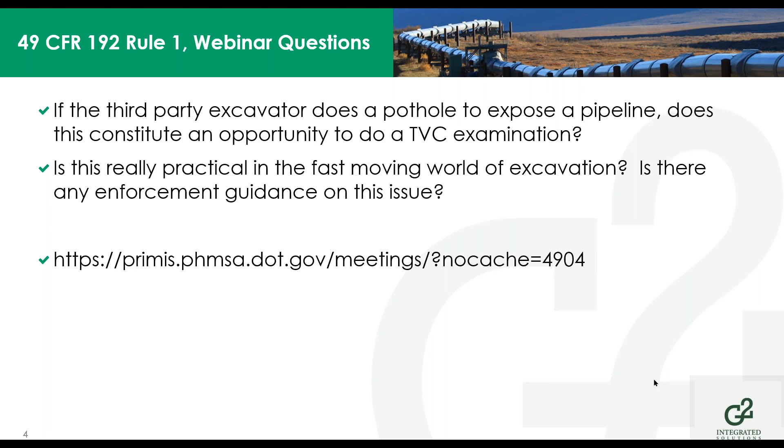We do agree that that can become a very difficult time. Someone's out just doing a pothole to identify where your pipeline is for some excavation or activity around your pipeline may not give you opportunity to do those examinations, but should those things move forward, and you have the opportunity to do so, PHMSA would expect you to do so.

Okay, and next, this questioner said, I missed the details regarding the process rule is not included in the 12/31 extension. It's talking about the stay of enforcement that PHMSA issued on April 22nd. The compliance date in that rule specifically identifies July 1st, 2020, of being a stay of enforcement surrounding that date. The compliance matters surrounding that date have been extended out effectively to 12/31/2020. So what was expected to be completed by July 1st, 2020 can now be completed by December 31st, 2020.

However, PHMSA does also state in that same document, they fully expect operators to maintain and continue their work towards compliance. So they would fully expect to see, even though we're involved in this pandemic and we've got isolation going on and staffing has been limited, that operators would have been moving towards compliance with that July 1st, 2020 rule.

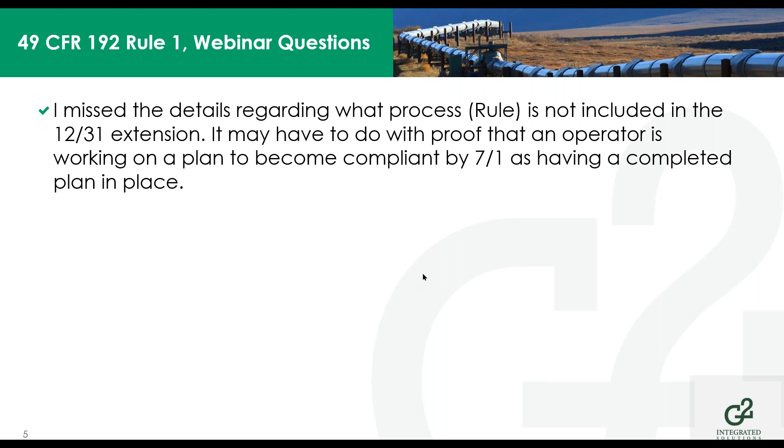Next question. Questioner asked, in a recent pipeline incident, a pig was stuck in the barrel. This would be between the isolation valve and that eccentric reducer that's typically in the barrel, from contaminants or possibly ice formation. The barrel was blown down, but the pipe between the isolation valve and the barrel was still pressurized. The barrel was opened, the pig became dislodged, exited the barrel through the open hatch, striking the employee. And the question is, is there any requirement to verify the entire assembly is depressurized or just the barrel?

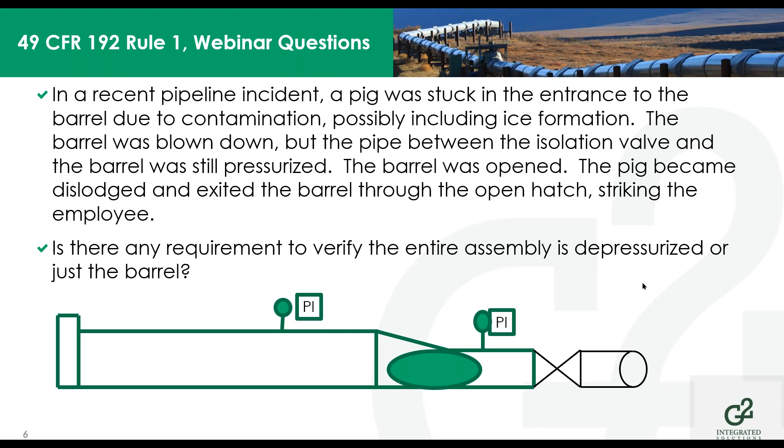Next one talks about, can a company use recent TVC studies to be compliant with the rule changes as long as the study was performed with the current requirements? And then they made a statement that says, I'm surprised how much of the mega rule seems to address things that companies currently do. And the rule does state that studies conducted before July 2020 can be used if they comply with the requirements of the regulation. Sufficient procedures and documentation of the study will be required to demonstrate compliance as always.

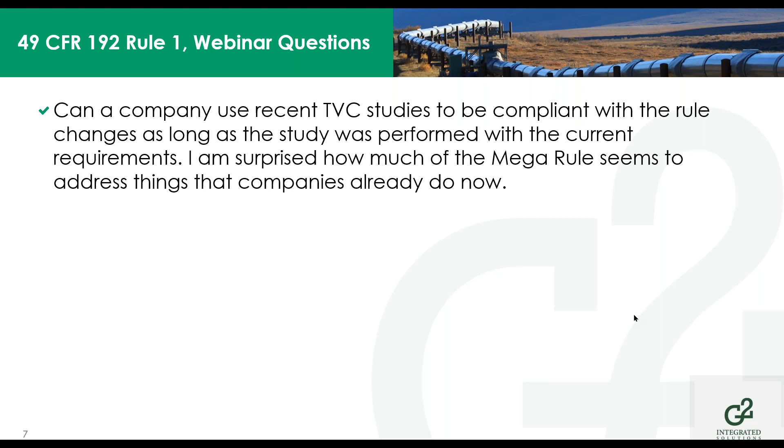And yes, it is true, and it is talked about in the preamble of the rule, that much of the language in the updated rule, Mega Rule 1, if you will, Section 1, addressed things that PHMSA had already addressed in the integrity management regulations. They just added clarification to those requirements.

Next question talks about, if the 15-minute hold for a spike test seems excessive, given research that has suggested a much shorter duration will accomplish the same result. And they want to know, how did PHMSA arrive at this required period? Well, first off, let's make it perfectly clear that we do not speak for PHMSA in any way, shape, or form. However, PHMSA did in the preamble address this very thing.

It talks about spike testing in the preamble, and it says using a short duration, very high spike pressure followed by a long duration integrity verification pressure provides greater assurance that the test is not growing cracks that could fail in service after the test is completed.

It states that PHMSA proposed standards for the spike hydrostatic test in 192.506, and PHMSA used several technical reports and studies, including PHMSA-sponsored research. One of those studies was the ASME Standards Technology Report, Integrity Management of Stress Corrosion Cracking in Gas Pipeline High Consequence Areas, and a final summary report, Recommendations for the Comprehensive Study to Understand Longitudinal ERW Seam Failures. In those studies, spike pressures ranged anywhere from 5 to 60 minutes in their application.

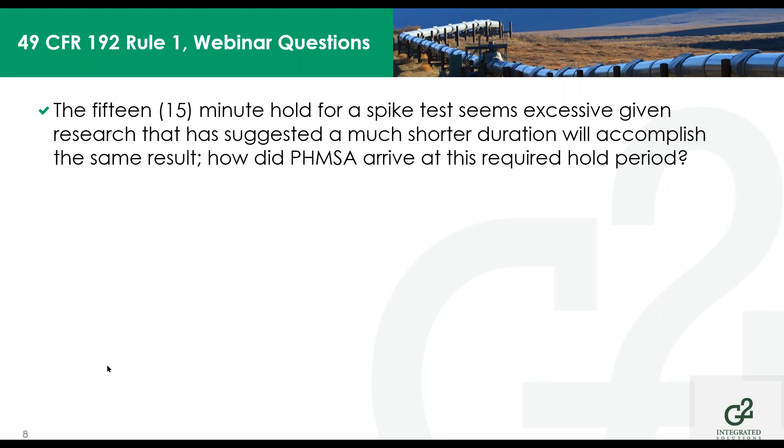The notice of proposed rulemaking recommended 30-minute spike duration, but in the end, the final rule issued changed that 30 minutes to 15 minutes. Now, I don't know if that answers the questioner's question, if that satisfies their desire, but my recommendation is that they would reach out to PHMSA for that and ask based on what criteria they settled on 15 minutes.

Next question says, what are the major downsides of any alternative technology over inline inspection for pipeline integrity assessments? 192.18 addresses notification to PHMSA for a variety of places inside the regulation. When the gas rule was published, alternative technology use is addressed. However, it requires that notification to PHMSA, and it requires specific information to be provided to them. And in some cases, it requires a 90-day waiting period.

So the alternative technology typically has to address the recommended practice, provide sufficient information to be comparable in a conservative measure to what the recommended processes would be. So in this particular case, alternative technology over inline inspection, the ILI, the alternative technology would have to provide as good information as the ILI would provide. Other technology that an operator demonstrates can provide equivalent understanding of the condition of the line pipe is what's necessary.

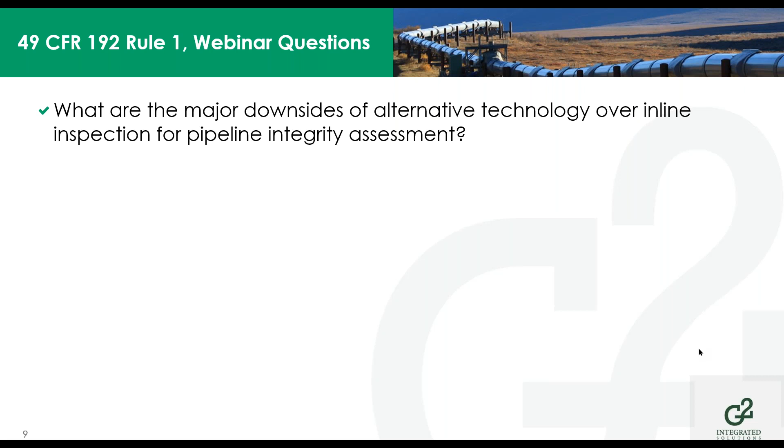So the difficulty with alternative technology is getting that information gathered that's going to give you comparable information to the provided technology, right? Number one. Number two is making certain that a subject matter expert is involved in that process, and statements to that effect are a part of that procedure and process as provided to them in accordance with 192.18. And then PHMSA can make a decision as to whether or not that alternative technology is acceptable.

Next question again talks about required spike testing. Will newer chart boxes be needed to clearly identify the 15-minute spike test, or will 15-minute interval reports be accepted? So in the spike test regulation in 192.517, it says there are specific pieces of information required in the report. Of course, the operator's name, the name of the operator employee responsible for the test, the name of any test company used, the test medium, the test pressure, the test duration. Then it talks about pressure recording charts or other record of pressure readings, elevation variations, so on and so forth.

But in the procedure itself, it says that 15-minute spike test has to be conducted once the test pressure has been achieved and stabilized. It is then raised to that higher pressure, and once that pressure has stabilized, held for 15 minutes. So I would suggest to you that a chart reading of that test would be necessary as a part of the record for performing the spike test.

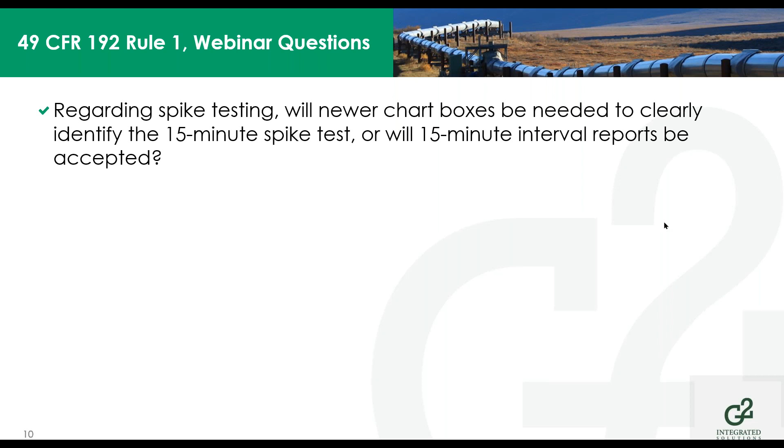Next question. If a previous assessment was completed, but not all of the 19 items were recorded or completed as the new rule determines, can they be duplicated, reassessed in order to meet the previous assessment requirement? So the 19 items identified in 192.712 is what we're talking about here. Indicates records you must document, justification, deviations, and determinations made for the following, and it says as applicable.

So the first thing you would have to do is determine what information you have of those 19 items. And as applicable, do you have all the necessary information that PHMSA requires to comply with 192.712? If not, then establishing those records, establishing that assessment would be necessary, and to fill in the gaps to be able to claim that previous assessment that was done.

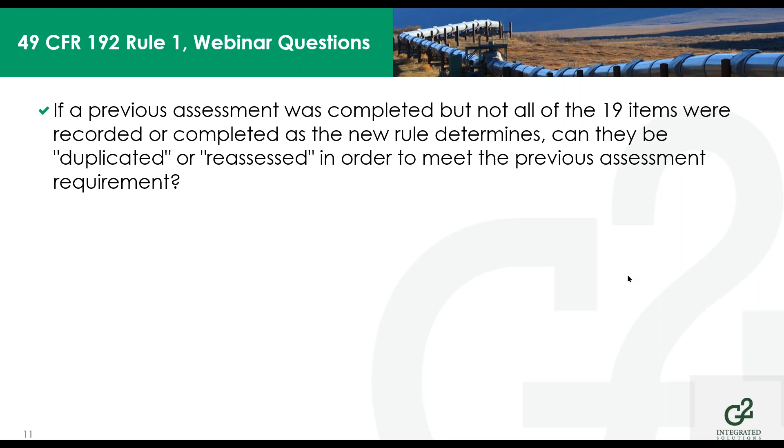Regarding the requirements for organizations to devise their own material testing plans, are there any accepted industry practices in place currently that strike a balance between confidence and cost? So in the preamble to the rule and in the documentation associated with it leading up to this rule, there was no specific circumstances of determining material testing procedures or plans to assess cost, specifically to this part of the rule.

No industry practices were identified in the regulations for material testing. The preamble does speak to material property records this way. It says PHMSA considers insufficient material property records to be those records where the pipeline's physical material properties and attributes are not documented in TVC records. So at this time, we're not aware of a study or analysis being done or presented for consideration on the confidence and cost factors for the material testing.

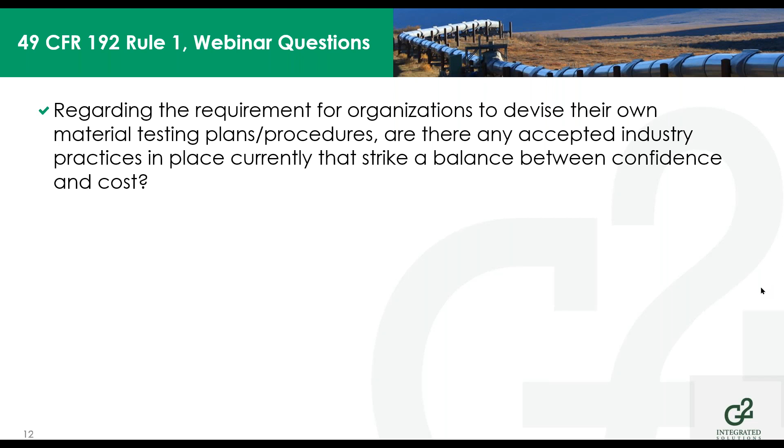That's something I believe that the specific circumstances of your pipeline segment in question would have to be considered. The environment, of course, that your pipeline is in, and the type of risk associated with your pipe and history of operation of your pipe would have to be taken into consideration as to what material testing practices you would follow and procedures you would use.

What is PHMSA's take in the situation where an operator just decides to class everything in the highest category of compliance when in actuality it's not in that category, such as if the pipeline's in class 1 and they decide to treat it as class 3 or 4, or if they have MCA locations but they claim they're HCAs? If they report in this way to the regulatory agency, and the regulatory agency then has to include them in the shuffle of actual higher risk pipelines, is that looked at as a problem by PHMSA?

Again, I have to say we don't speak for PHMSA, but we'll attempt to answer your question. As with any compliance matter, the regulations as stated on the cover page are the minimum safety requirements that an operator must achieve in order to operate their pipeline. If an operator chooses an alternative compliance approach other than what is prescriptive in the rule, they have to follow a more conservative compliance practice. And the only concern would be that they make certain they do a gap analysis between the two levels of regulatory compliance that they're trying to accomplish, making certain that they follow the most stringent requirements included in both.

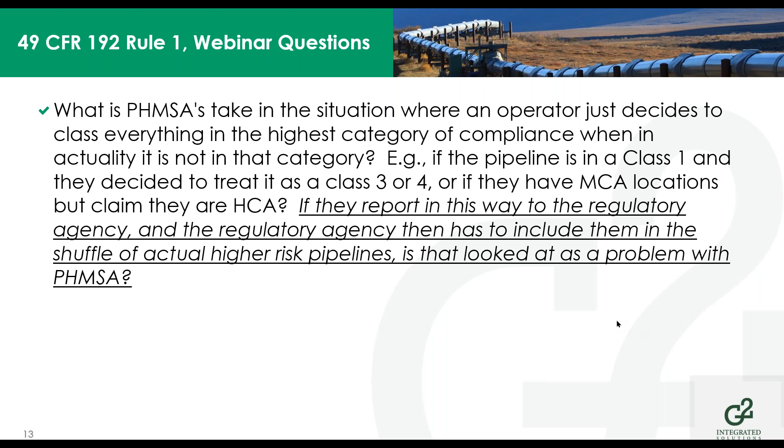Be aware, if you do this, if you go to the higher level or the higher degree of compliance, that you have to meet all of those things. Even if your pipeline is not required to by code, you still have to meet those additional measures. The last part of the question would have to be presented to PHMSA for an answer. I don't know about risk. We all know that there's a conversation about risk ranking for inspection practices that PHMSA conducts, but that information is not public information. So I would recommend that the questioner go to PHMSA and ask that question to possibly get an answer there.

Next question talks about 192.127. If an operator has a pipeline less than 30% SMYS, not in a class 3 or 4 location, or in an MCA, 192.624 would not be applicable. What would an operator need to do to perform to obtain those records? So we're talking about an operator that doesn't have records, because 127 is a records requirement. It states if there are no records, then the operator may be subject to 192.624. It says that because there's an applicability statement in 192.624, right?

And it talks about the fact that if there are no records, then the operator may be subject to 624. So if the pipeline is in an HCA, according to 903, 624 would apply, because the rule states in 624, if there are no TVC records, records necessary to establish the MAOP, including records required by 517, are not TVC, either of the following items have to be done. If you meet these items, are you in an HCA or are you in a class 3 or 4 location? The questioner asked about whether or not they were in a class 3 or 4 or an MCA, which is the second half of the requirements.

If the MAOP was established in accordance with 619(c), the pipeline segment MAOP is greater than or equal to 30% of SMYS. Questioner said it was not. So we're going to throw out the fact that it doesn't meet the second half of the requirement, because the rule says either or, right? So if it's in an HCA, then they have to follow those requirements. They do have to follow 624.

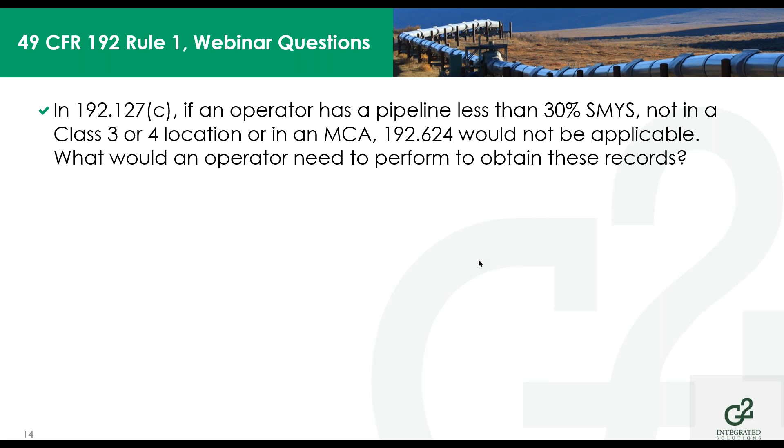I hope that answers the question.

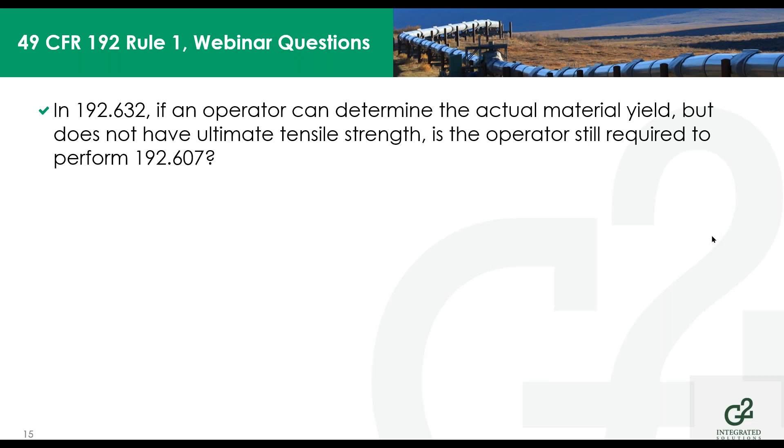In 192.632, if an operator can determine the actual material yield but does not have ultimate tensile strength, is the operator still required to perform 607? That's the question. In accordance with 192.632A24, an engineering critical assessment states that if yield and tensile strength are conditions not known, the operator has to follow 607 or use 30,000 PSI as a factor. So it's got to have both - it needs yield and tensile strength, or default to the 30,000 PSI value.

In 192.710A2, if a pipeline cannot accommodate an ILI tool and is located in an MCA, would 710 still be applicable? The rule section states that applicability is for pipelines operating at equal or greater to 30% SMYS, located in either 1, 2, or 3 as listed in the regulation. Number 2 states that if it is in an MCA and can accommodate inspection by an ILI - so if the pipeline cannot accommodate an ILI, it would stand to reason the section would not apply.

However, you are required to make piggable segments of your pipeline that are not, when modifications or repairs are made, in accordance with 192.150. So as we move forward in time, for those areas that meet that requirement, they are in an MCA but cannot accommodate an ILI. At some point in time, as modifications and repairs are made, that pipeline segment is going to need to be made piggable.

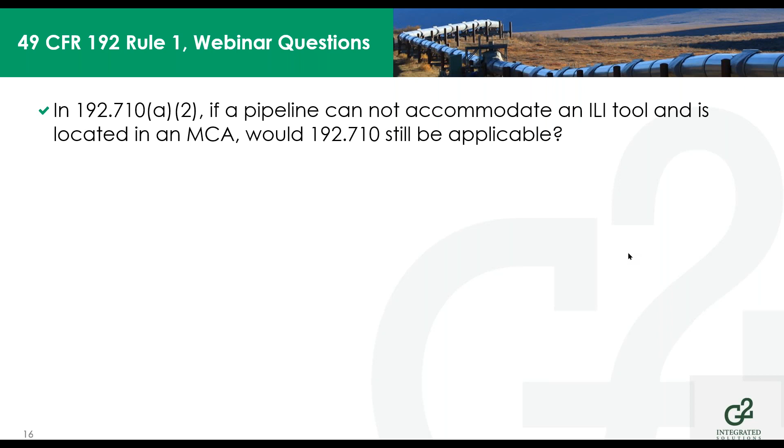192.712. An operator has a grandfathered section of pipe operating at 22% SMYS, and the operator has an anomaly. Would the operator be required to follow 712E, which requires use of 607? That's the first question. The stated purpose of this section of the regulation is to predict the failure pressure of an identified anomaly in order to perform analysis. TVC records are required, so if the anomaly falls into consideration of 712, then 712E would apply.

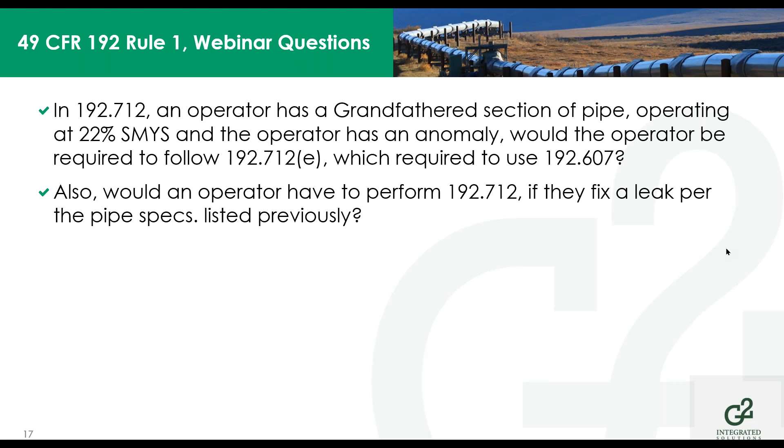Now, would an operator have to perform 712 if they fix the leak per the pipe specs listed previously? Well, that depends on what the leak was - the character of the leak. If it's corrosion or a crack-like defect, then it would be considered an anomaly under the requirements of 712. So 712 would then have to be followed, along with 607.